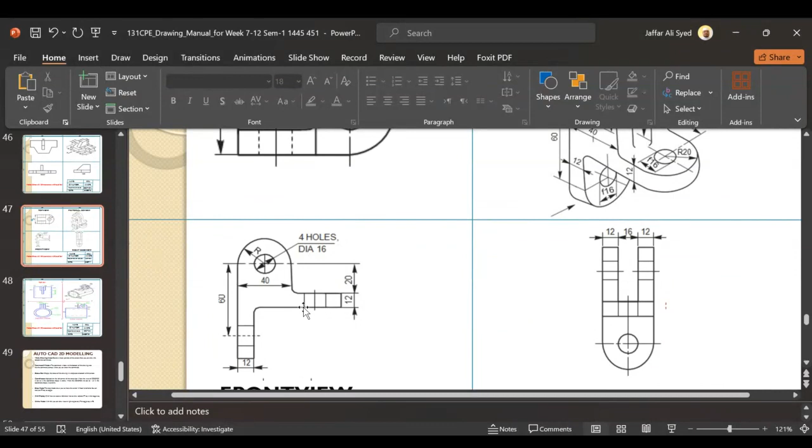Now there are lines which are not visible. For these two lines you have to use dash lines here. I can zoom it. Yeah, here you have to zoom. Here I drew it as a complete solid line, but you have to use a dash line here. And here also one dash line with one big dash and small dash, so that it shows there is a circle behind the object. Now this is the front view.

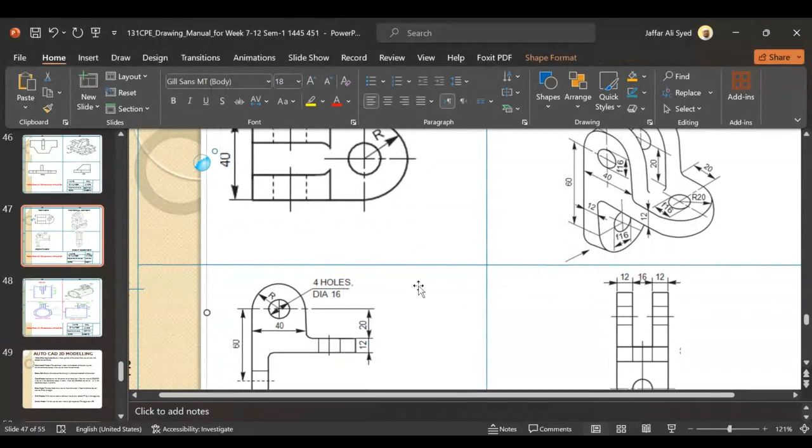Okay, any doubts in the front view? Here also another circle is there. Here you have to use dash lines here and here, and this is your locus line. The dimensions I am showing like this, but what I explained in class, only that you have to use for the dimensions. This figure I got from Google. The dimension lines are not that clear, but you have to use them as per our class.

Now coming to the top view, when you see from the top, here it is 40. That is 12 plus 16 plus 12, completely 40. So you can box here 40 by how much size? You can see here 40 by 40. Yeah, here 40, up to here 40. That is from here 20, again here 20, 40. From here another 20, that is 60.

So this 60 line, here also 60 line, here also third line is 60 and fourth line is 60. That is 6 centimeters. Now from this is 40, I think. Okay, from this 6 centimeters, make a center point, that is at the 2 centimeters. Make a point here so that it will be center.

And now I will draw again two circles. One is full circle, one is half circle. Full circle is 16 dia, that is 8 mm. Draw the 8 mm diameter one circle, and the second half circle is 40 dia, so we have to use 2 centimeters as a radius and draw with a compass, 2 centimeters radius.

This is your top. Here also same. This is a locus line. One big line, one small line, big line, small line, not solid line. These dash lines are like a hidden circle, which you cannot see. Now this is about the top view.

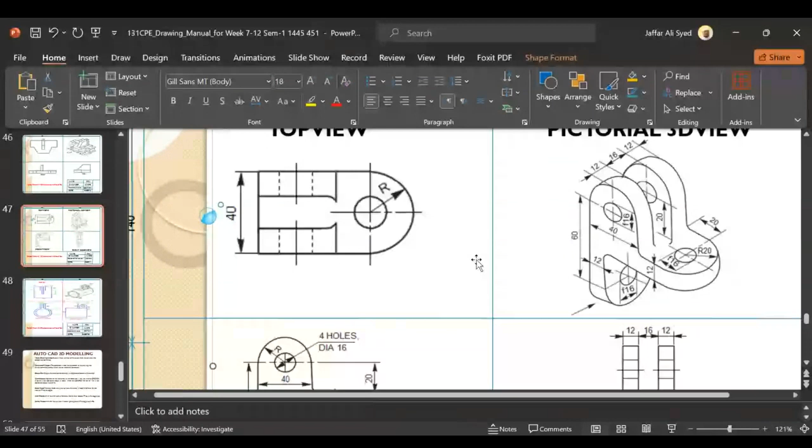Now coming to the side view. Side view is slightly typical, but you can draw easily by making parallel lines to the front view. From the front view, we are starting from here. So from here it is joining here, and from the top it is joining here. So 100 mm is the actual height.

You have to take the exact length, 12 plus 16 plus 12, that is 40. So 4 centimeters. In this 4 centimeters, you can divide 12, then 16, then 12 like boxes. Now come down up to 8 centimeters, not 100, not 10 centimeters. Up to 8 centimeters only you have to draw. Again here also 8 centimeters come down.

Now draw this up to, oh, just wait. Yeah, this is 20 and this is 20, 40. After the 40 it is 12. So this line is up to 20 here, and this line is up to 20 here, 40. This is up to 40, one solid line. After that 12 mm another solid line. So like this you have to draw this one.

And these are the dash lines, hidden circles, and this is the locus line. One big dash, small dash, big dash, small dash. Now, 8 centimeters is finished. Now this side and this side. Now coming to the two circles. From these 8 centimeters, from 0 to 4 centimeters, make a point here at 2 centimeters, that is center point.

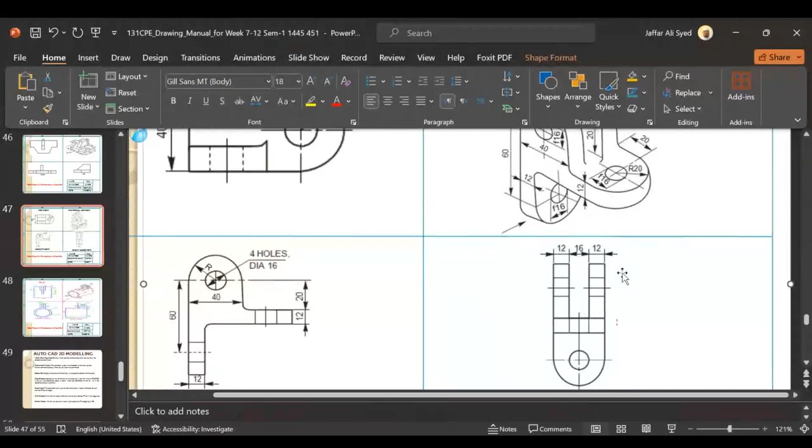Now here also same, take 16 mm dia, means 8 mm radius one circle, and 2 centimeters radius another half circle. So it will be finished. Now you have to draw all the dimensions without fail. Many dimensions are missing here, so you have to draw wherever the dimensions are needed. Okay, this is about the sheet 7.

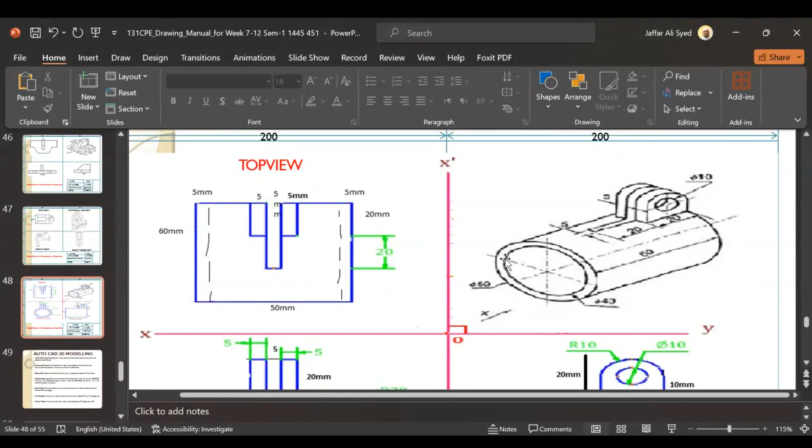If you see from this side, this is the front view where you can observe only two circles, one inner circle, one outer circle. Inner circle size is 40 dia, then 50 dia. So we have to take a compass, make it half, that is 2 centimeters radius one circle, another 2.5 centimeters radius circle. So two circles you are drawing here. One is 25, another one is 20. That becomes 40 and 50.

Now on the top of this one, you can see these rectangular boxes with the equidistance 5 mm. 5 mm from the center you have to check. From the center 2.5 mm left, 2.5 mm right, so that it will be exactly 5 mm. After that, another 5 mm on the right side, another 5 mm on the left side. Total 3 boxes will be there.

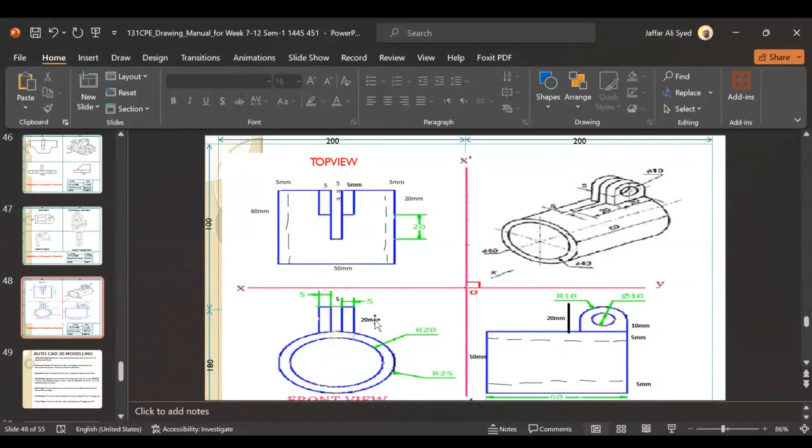Okay, now coming to the top view. If you see the top view from the top, actually it is a hollow cylinder, but when you see it from the top, it looks like a rectangle. Now see the rectangle size: the complete length of this one is 60 and the diameters are 40 and 50. So first the length, you can say height, 60, and this one is 50.

Now in between this 50 there is another circle which is hidden. So that hidden circle has the dash lines here. This is the dash line, which is the hidden 40 mm diameter circle inside the circle that you cannot see. So you can compare from here. This is the inner circle which will project on the top view as a dashed line. So this is 5 mm, this is 5 mm.

Now these two are projected as rectangles on the top, like this: one 5 mm box with height 20 and another 5 mm box with height 20 on the left and right. In the middle it is a 5 mm rectangular box, but it is 5 by 40, that is 20 and 20, 40. So like this you have to draw.

Now here I mentioned just the sizes, 5 mm, 50 mm, without the dimension lines. You have to use the dimension lines we studied in the class. Do not follow these dimension lines; you have to follow what we studied. Okay, about the diameter dimension, it is shown here like this; you can use the diameter, no problem.

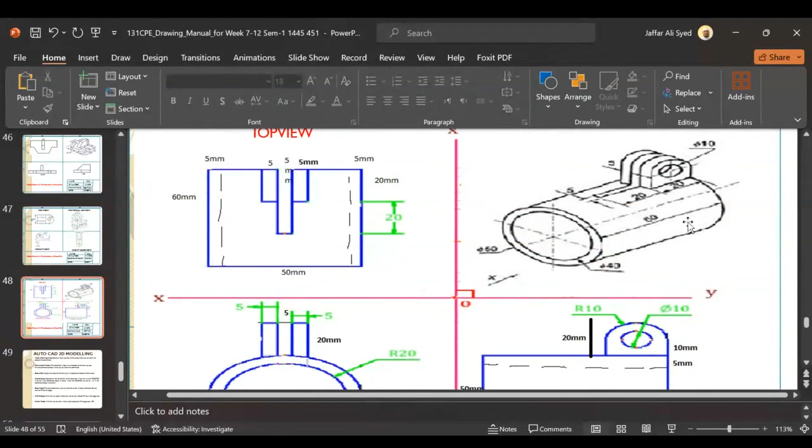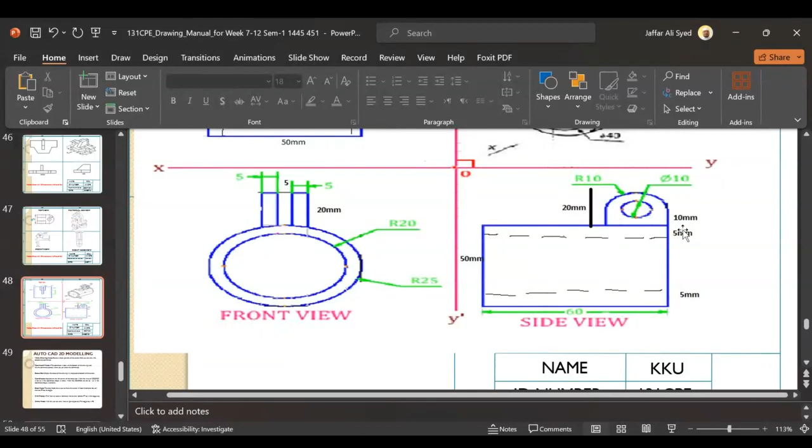Now the side view: when you see it from this side, the hollow cylinder will look like a rectangle only. So what is the size? 60, and height is 50 and 40. You can project the 50 and 40 from here, and the length is 60. Same, the inner circle is hidden, so a dash line will come here and another line here, with 5 mm, 5 mm as the height.

Now this 20 mm line is not there. This one is there; 10 mm is the height. Here also 10 mm height. What is the distance here? It is 20, you can see 20 is there. So 20 is the length here and height is 10 mm here. 20 and 10.

Now from this center you can put one dot here at 10 mm, that is 1 centimeter, and draw a circle with 1 centimeter or 10 mm radius. No, I think it's wrong. We have to use 5 mm. Sorry, 5 mm; the 10 mm is the complete diameter. So you have to use a compass for drawing. For a 10 mm diameter you have to use 5 mm as the radius and draw a circle at the center.

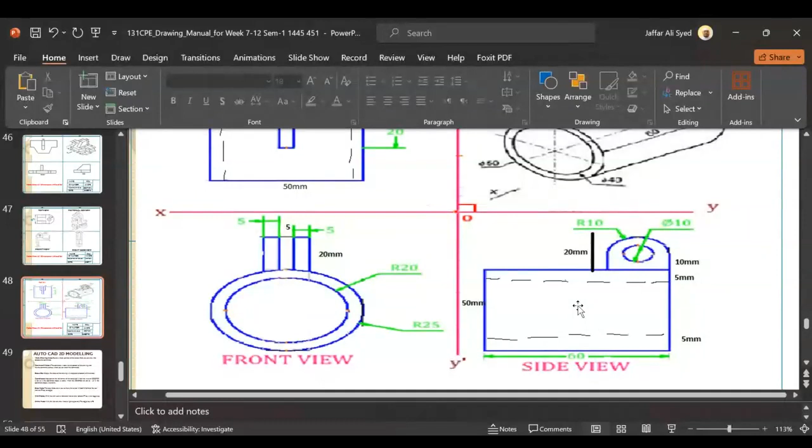Now put another point here for the center and use 10 mm as the radius to draw this semi or half circle. So don't draw this line; it is not there in this. I have to delete it later. I put that line only to show the height is 20 mm. Now you have to use proper dimension lines here, what we studied in the class. So this is about sheet 8.

So these two sheets you have to draw at your home and submit by next class, the same day. So be careful. Two sheets are not that tough, easy only. It may take mostly 1.5 to 3 hours, not more than that. If there was class today, you could draw in the class, but unfortunately due to rain we didn't have class. So draw in your free time at home, complete it and submit by next week. Okay, next thing I want to tell. Before that, any doubts in this?

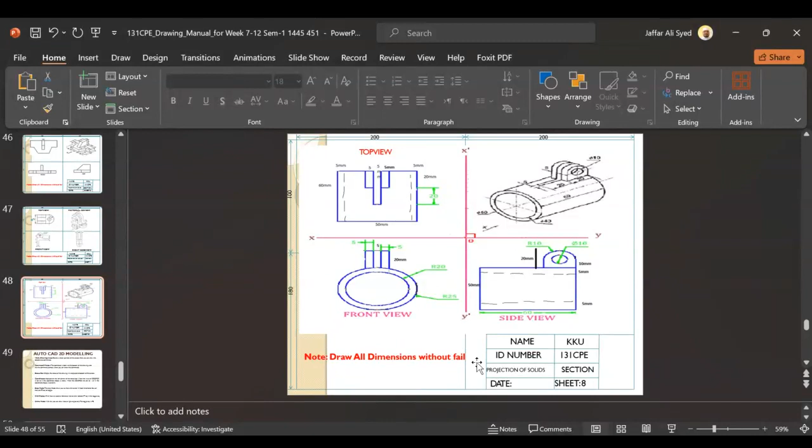Okay, no doubts. So I will stop this one, and the next item I want to discuss is, yeah, about this one. About the homework that I uploaded in Blackboard. I will discuss something here. Share application.

Yes, ma'am. Should we draw circles with points? You can use the compass, or you can use the circular one in the scale. In the scale, some circles, holes will come. You can purchase that one, no problem. Up to you, either. But the dimension should be the same: 10 mm, 20 mm, 40 mm. That one you can use, no problem.

If you don't have the compass, you can use the circular. The circular means in a scale, small holes will come. On that, the dimension will be mentioned: 1 mm, 5 mm, 10 mm. All holes are predefined. Okay, you can use that one. Thank you, Doctor. Okay, we'll go to the next one.

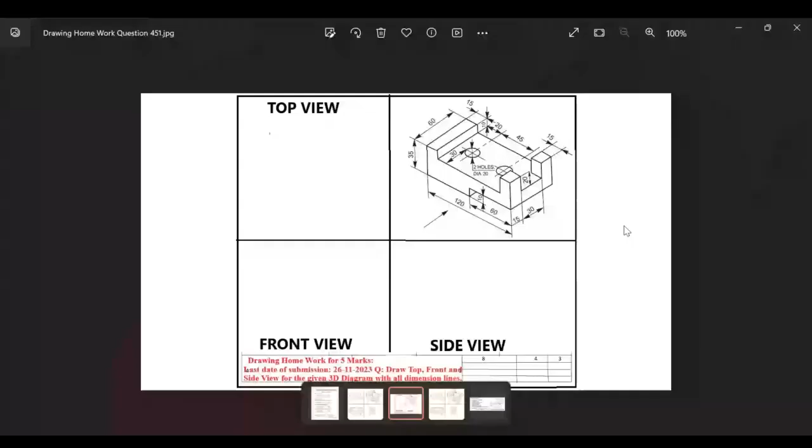This one is the homework. You can see this is a 3D homework and it has 5 marks. So be careful. You have to be precise when you are drawing. This is the 3D. No need to draw this part. Only you have to draw top view, front view, and side view. The side the arrow is showing is the front. As per that, this side will be the side view, and the top is this one from this side.

So be careful and draw properly how the top view will be, how the front view will be, how the side view will be, and fill the details here: your name, ID, section, date, and title. Title is homework, drawing homework. You can type here, no problem. Sheet you can type as sheet homework, HW. That's up to you. We will take care later. But the top view, front view, side view should be proper.

See properly here, judge exactly how much is the length, how much is the width, how much is the height, or how many circles. There are two circles here. You can see each diameter of 20 means 20 mm, so 10 mm is the radius. The distance from here is 30, so total 60 is the width. So the circle is exactly at the center, at 3 centimeters, 30 mm.

From there you can use the compass with 1 centimeter as a radius and draw a circle of 20 mm diameter. As per that only you have to draw this one. Two holes are there, some gap is here, everything you have to check. I know this is a little hard, but you are getting 5 marks for this one. Regular class sheets are 2.5 marks. Here it is 5 marks. So you have to work hard on it.

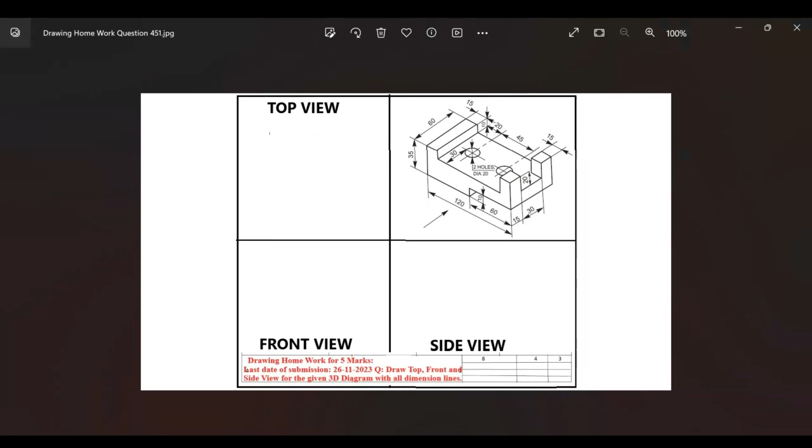Next week we are going to have another portion, that is electrical wiring. So the drawing chapter will finish this week. Next week you can bring the boards if you have them, in case we have some changes in the diagram so that you can make them. Then I will send one lab manual for electrical wiring. You just have to come and attend the class. Nothing to carry. Okay. Thank you.

Okay, I will stop the lecture. Any doubts? Another chance to ask, anyone. If you have any doubts, you can ask. I will upload this video also so that you can see and draw the diagrams easily. Okay. Someone sent a chat message: how to submit drawing sheet 6.

Yeah, sure. Any pending sheets you have, next week you can submit under my door. You can push it. If I am available in the office, you can directly give it to me by hand, or you can come to the class and submit it. No hurry. Okay. Sheet 6, 7, 8, no problem.

But for sheets 1 to 5, before sheet 6, you have late marking if you have old sheets, because only sheet 6 is pending, not the other sheets. So sheet 6, 7, 8 and homework, next week onwards you can submit anytime, no problem. Okay, thank you, see you.